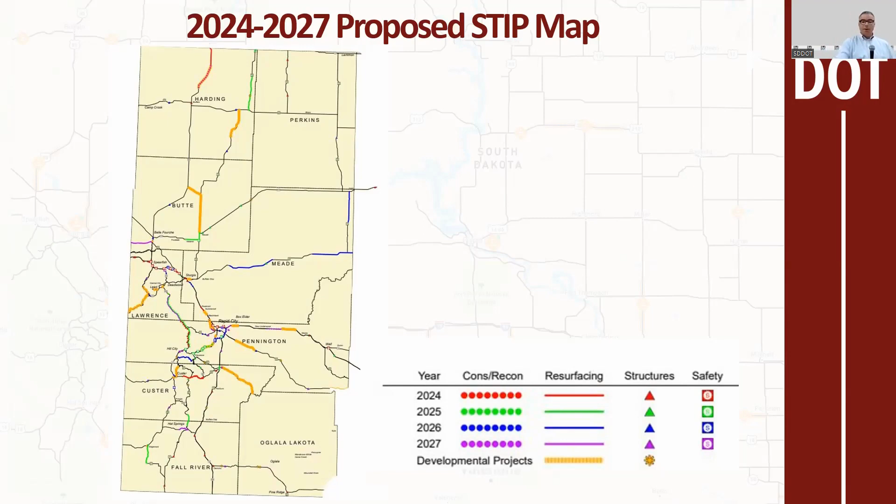Or take input, so please use them as much as you possibly can. As we think about transportation, the intent of the meeting tonight is to be engaging. We're not going to be speaking the entire time. We're going to be asking for input, hopefully have some good collaboration and discussion.

As Todd mentioned earlier, we're going to have that opportunity to speak into the microphone tonight. Again, if that's not your cup of tea, we're going to be around afterwards, split up into different groups. So if you've got different ideas or questions on safety or other things, please come over and visit with us afterwards. But again, we only know what we know, so if you're seeing things, hearing things, maybe you've experienced a couple issues, please share those with us. We'd like to improve transportation and safety overall.

As we think about a transportation system, you have to fund it, right? The money's got to come from somewhere. So transportation is really funded through federal aid and through state fuel tax. You can see what our anticipated expenditures are into the next 4 years: 1.2 billion planned in 2024.

Anyone here driven Highway 44 near the Platte Winner area? We have a very, very long bridge out there, over a mile long. We're planning for that bridge to be replaced starting in 2024. Don't worry, the existing bridge is going to be there while we build a new one. But that project alone, that one bridge, is about $250 million. That's one of the big reasons you see that project and those dollars going up in that first year.

As you look at South Dakota, we have East River and West River. That's kind of how we define things in our state, because the river really divides the state to some degree. So the bridges that we have crossing the Missouri, a lot of those were built 40, 50, 60, 70 years ago, and they're starting to show their age.

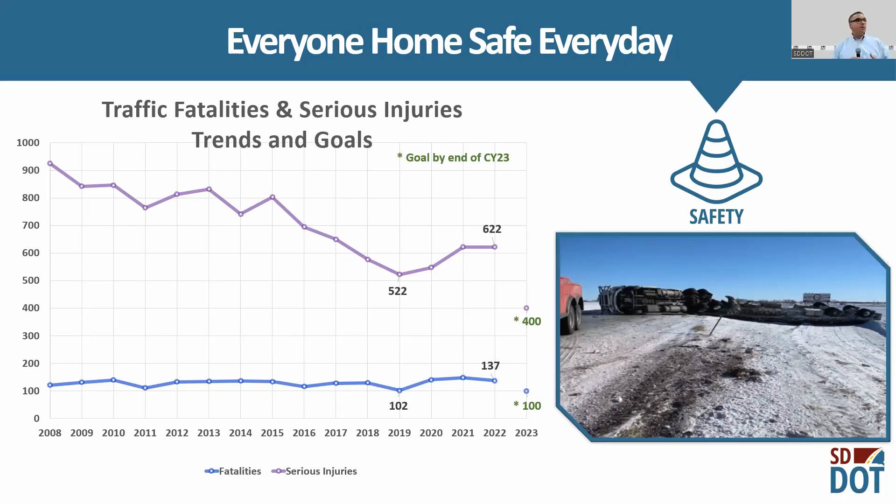As we think about crashes and what causes crashes, is it the roadway? Is it the intersection? Is it the person? Is it an intermix of all those? Those are things we have to be thinking about as we move forward.

We've tried different tools, techniques, and innovations. For those familiar with that noise, that's our rumble strips. I think if you make that noise, most people know what they are. And they've saved lives, whether they're on the center line or on the shoulder. Some of the numbers up there show how effective they've been. They actually serve no purpose from a transportation standpoint, and they're actually a detriment to the life cycle of that pavement, but they keep people alive.

High friction surface treatment is another technique we've used. We joke that we've got two seasons here in South Dakota: construction season and winter. And when you're not expecting a slippery condition, maybe on a curve, that's where we see an overrepresentation of crashes and serious injury and fatal crashes. So we tried this technique of high friction, using a very abrasive, very hard rock, essentially gluing it down to the pavement. It helps ensure there's good interface and makes sure that tire can stick to the pavement more often. Again, a technique trying to make sure drivers are staying on the roadway.

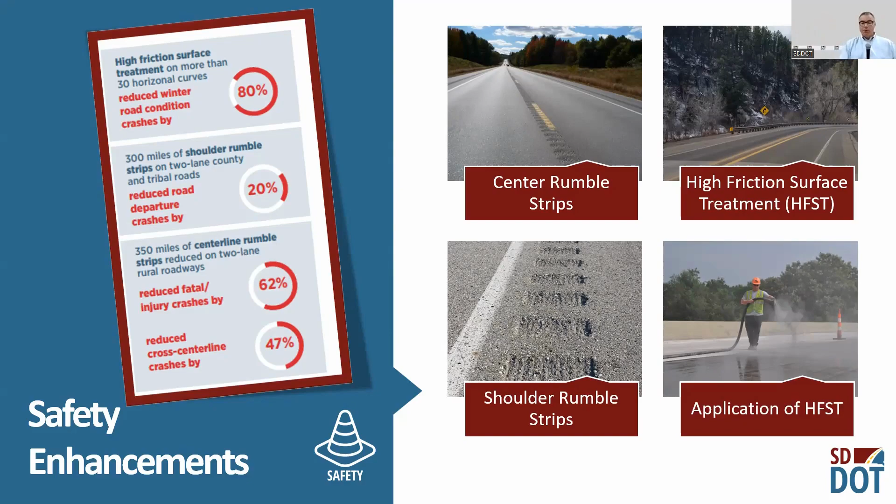We've tried other things and we're going to continue to try innovations. I think most of you folks made it through the Diverging Diamond Interchange. Did anybody not make it through the Diverging Diamond Interchange here at LaCrosse tonight? Awesome, excellent, 100%, and everybody made it here safe. And it worked very well.

For those of you in the Rapid City area that have used that before, when we didn't have the Diverging Diamond, you know what it was like. You'd get traffic queue spillbacks, you couldn't make your left turns, and people were taking chances when they shouldn't. Every time I've been through that, which is four times now, I've seen pedestrians using it and they looked comfortable out there. So another good improvement, knowing that transportation is not just about moving cars and big trucks, but people use our facilities too. So as we think about safety, we need to be cognizant of that.

We've got another one planned on 41st Street coming up. And of course, our 511 app. For those of you that aren't aware of the 511 app, we'll help you get it downloaded on your phone after the meeting tonight. It's an excellent tool you can use to help improve your decision-making when driving in poor weather conditions, or improve your travel time, or plan your trip based upon construction activities. Again, trying to put the information in your hands and users' hands to make good decisions.

Now, Todd, I know safety is a priority for the department, but it's been a huge priority for you. We've had the pleasure of working together for over 20 years, and one of the things I've learned from you is we need to be safer. What are we going to do? How can we keep people safe on the road? So do you want to cover a little bit what's planned here in the Rapid City region?

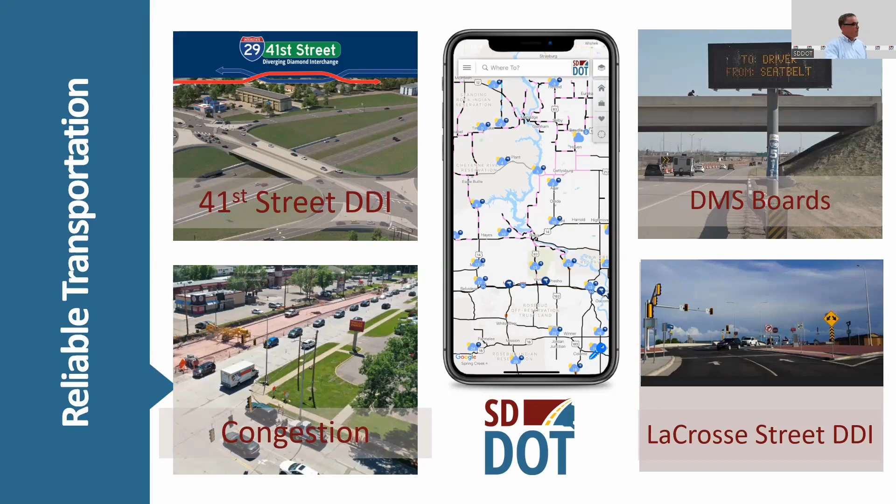Yeah, just one thing I'd like to point out, Mike, is again, you want to reference the handout you all should have. This is the projects within the Rapid City region. In that handout, as Michael was referencing, there's a lot of standalone safety projects, and they're pretty easy to identify. I might point out those high friction surface treatments, where we glue some really abrasive rock to the roadway, which really reduced the number of wet weather crashes we've had when we use that product. There's signing projects where we actually funded signing upgrades on county roads that will improve the safety of those roads. There's a shared use path that the department has funded for local communities, to get pedestrians off the roadway and on their county path. And as Mike pointed out, rumble strip projects.

But one thing I'd like to point out, as we start more of the interactive discussion, is the importance of roadway width to safety. On the slide up there on the map, there's 13 projects within the Rapid City region where we're making the road wider, which is probably not a surprise to everybody. A wider road is a safer road.

For every foot of shoulder we have on a road, we see a reduction in crashes. So the department's making a very substantial investment in widening roads, on either extending shoulders or complete regrading of projects, to make a roadway wider. And we're expecting a significant reduction in crashes on those roadways.

So as you think about safety and needs on the statewide system, are there roads that we're missing? When it comes to safety, what are we missing on those roads? Projects that should be improved. And the investment plan is over $160 million, which is a huge investment.

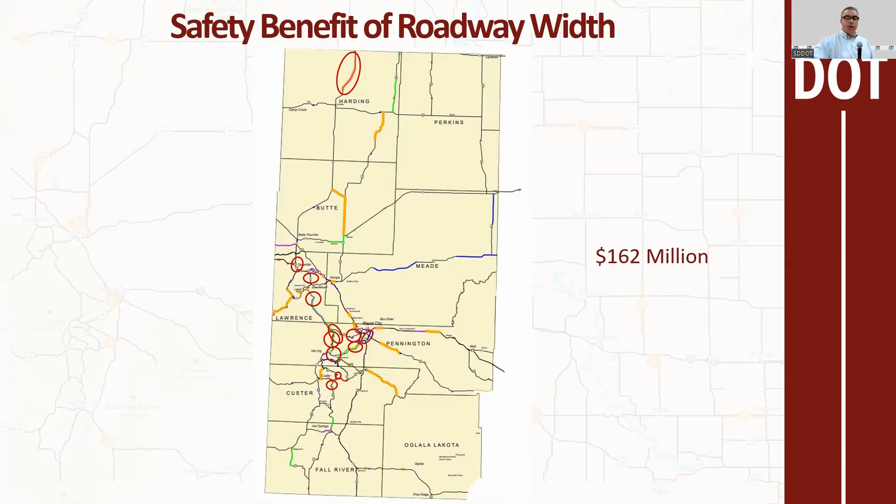So this is the part where Mark is going to be ready to start handing off the microphone, because I think it's important that we hear from you on what opportunities you see to help improve safety. And I've got 3 areas.

The first one's on the road. And the reason I'd like to focus on that is our number 1 fatal crash in South Dakota is a single vehicle runoff road crash. So that's our number 1 fatal crash that we have in our state. Our number 2 is at intersections.

And it wouldn't be anything if we didn't talk about what happens in the car, because driver behavior plays a huge part of whether you're on the road and how you're navigating down that road or at an intersection and making decisions. So we've had some great conversation in Aberdeen, in Sioux Falls, and I'm expecting the best conversation here in Rapid City, because it's the best group that we work with all year, but don't tell the others that.

So Mark, you can be ready to go, and please raise your hand if you have some ideas, things you've seen in other states or things you've seen that work well here in South Dakota.

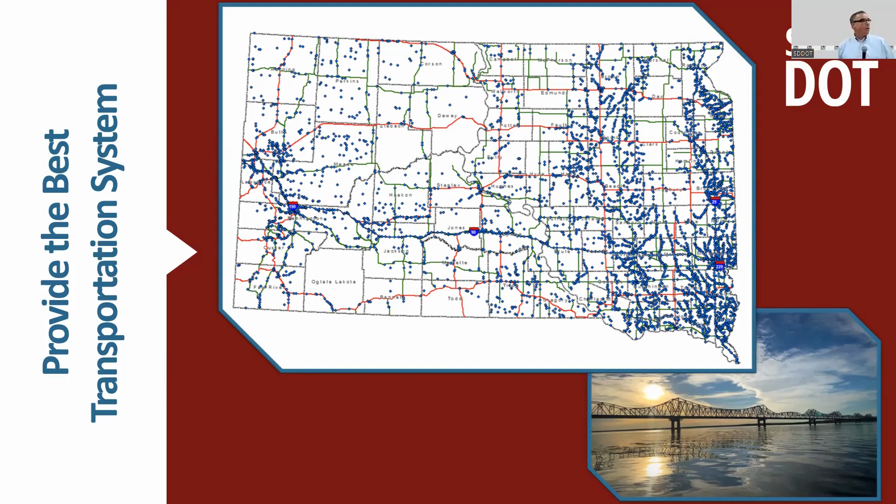As you look at usage and how many trucks or vehicles are going over, obviously there's more in the state highway system with the interstate and higher travel volume roads. So we're trying to maintain our bridges in good condition. I mentioned earlier the Platte-Winner Bridge, the Forest City Bridge, and the Pier to Pier Bridge. We measure all of our bridges as being in good, fair, or poor condition, just the general 1, 2, 3. You can see the condition and anticipated condition of our bridges in the next 5 to 10 years.

Right now we're sitting at about 97% of our bridges in good to fair condition. You can see we're anticipating that to drop off a little bit. We've known we're in pretty good condition, which is why we're really focusing on those major bridge investments coming up, like the Platte-Winner Bridge and the bridge near Gettysburg, which are going to cost hundreds of millions of dollars to construct. We're also trying to ensure the condition of our bridges remains relatively good, because like any asset, like a vehicle, if you don't change the oil, it's not going to last you 100,000 miles. So proper, timely maintenance activities on those bridges have been critical, and we're going to continue to do that.

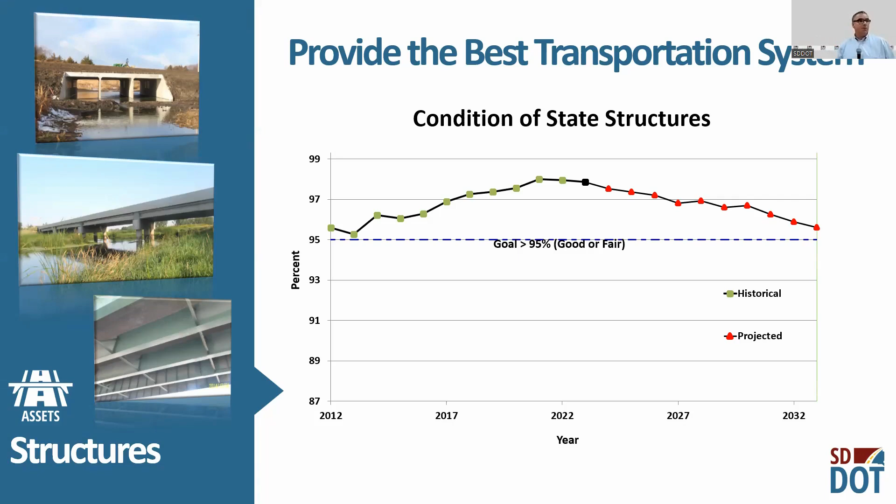We're also not just investing in bridges, but investing in innovation, ways to build bridges better so they last longer. In the upper left-hand corner, there's no such thing as flood proofing, but there is flood resiliency. So we're incorporating new design features to ensure our structures last longer and can survive those very large events that in theory come only every 50 years, but sometimes it seems like they come every 10 years. If we have a piece of infrastructure that costs $20,000 per linear foot to construct, you want to protect that investment.

In the lower right-hand corner is actually just steel, but it's stainless steel. We've got 2 seasons really, construction and winter. When winter comes, we use quite a bit of chloride salts on the roadway, and when you put salt and water next to steel, it doesn't turn out very well. That whole chemical composition changes the steel and turns it into rust. When things rust, they get bigger, and when they get bigger, concrete spalls and starts popping out. So by using stainless steel in our bridge decks, it costs more to begin with, but we can save over 25% in the overall life cycle. Again, a change, trying to innovate and find new ways to do things.

And yes, in the upper right-hand corner, that is a drone, an unmanned aerial system that we actually use for inspection on our bridge structures. We can also get additional information. We're looking at using LiDAR, trying to get 3D visualization of those bridges so we can do better analysis and engineering on them. Again, trying to find ways to do things better so things last longer.

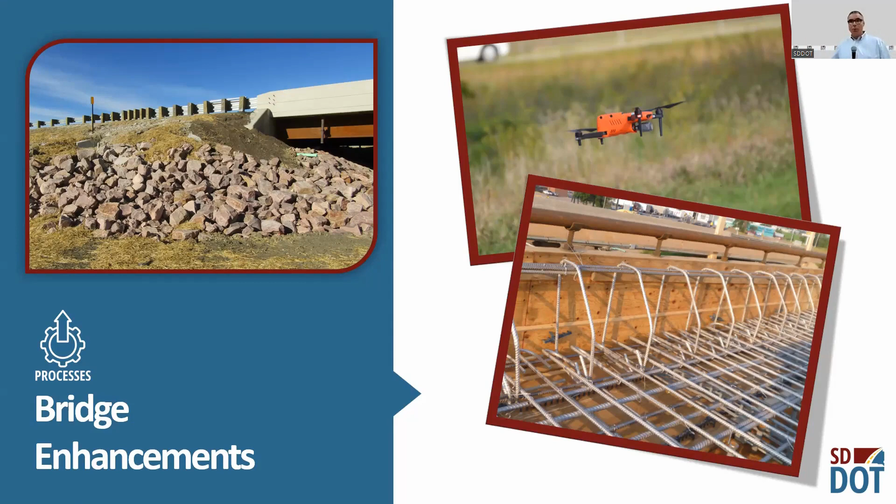Our pavements, of course, are needed too, otherwise you just got a bridge over water - it may be trouble or not, but I'm not going to get into that. Our pavement condition, as you can see, we try to maintain at least 80% of our pavements in good condition. You can see the line at 20% - we want no more than 20% in yellow or red, which would be poor to fair condition. Right now in 2024, around 90% of our pavements are in good to excellent condition. Looking into the future, we're starting to see that drop a little bit.

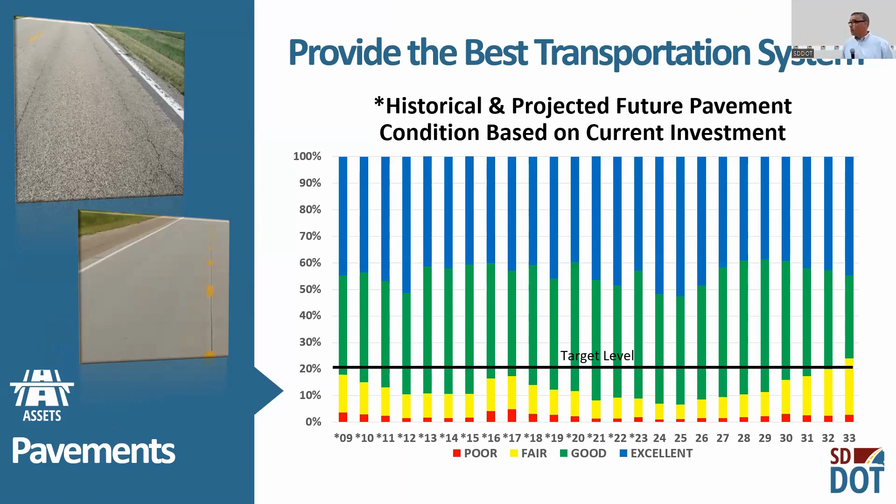So what are we doing? How are we trying to build pavements better? We're employing innovations. Some of that is a notched wedge joint, and I know that sounds really odd, but like anything - or a dovetail connection if you're a woodworker - how can we make those two joints tighter? Because water and salts are our biggest enemies here in South Dakota.

In the winter, you get freeze-thaw cycles. With pavements and roads, it doesn't just freeze in November and thaw in March. It goes through hundreds of freeze-thaw cycles throughout the winter. When that water freezes, it expands and blows things up, so that weak spot's right in the center, which happens to be right where we put those center line rumble strips sometimes too.

So what are we trying to do, and what innovations are we using to make that pavement last longer? We're notching those together, trying to make that tighter seam. In the lower right-hand corner, that's a new concrete pavement opportunity we're using, next generation concrete pavement. We're going to pave it and grind it. It may sound weird that you're going to grind something brand new, but it gives us better ride and better durability at the end of the day.

Again, trying new innovations. In the upper left-hand corner, no, that is not a fish locator. That's actually something we use to help with intelligent compaction. I know it seems odd, smart compaction, you're just hitting something, making it harder, but it's intelligent compaction. Thermal imagery along with GPS make sure that the roller patterns, as they go over and roll that asphalt, get it to the optimum density at the end of the day. Optimum density means it's going to last longer. Again, trying new technologies and innovations to make sure that investment lasts for future generations.

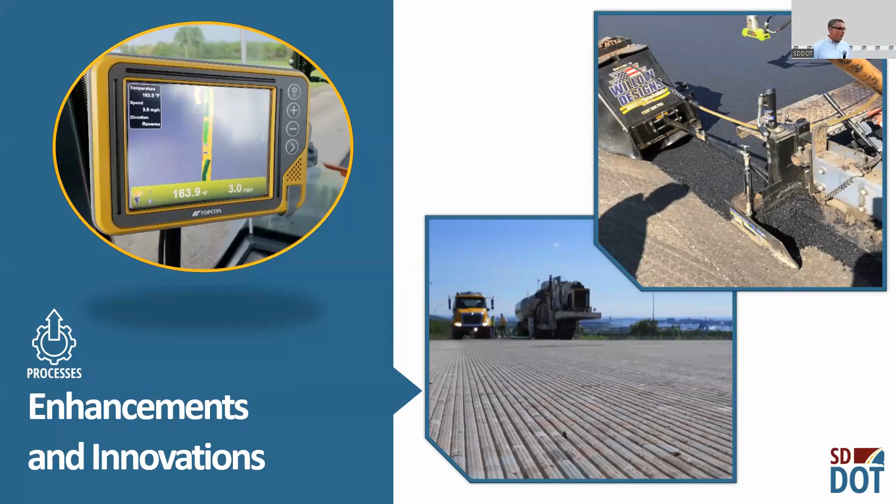Now, Todd, I know there's a lot of work coming up in the Rapid City region. You just want to give a quick summary of the overall investment? Yes, sir. In the handout that you keep referring to, projects within the Rapid City region total about $805 million worth of work. That's quite an investment in the 9 counties in western South Dakota.

To break that down, there are about 36 bridge projects at a cost of $113 million—those are bridge replacement or bridge repair projects. There's 22 reconstruction projects totaling $516 million, a very large investment in reconstruction of the state highway system, and 23 surface repair or preventative maintenance projects totaling $138 million. So a very large investment in transportation needs in western South Dakota.

So what's missing? That's why they're here. Oh, yeah, they're going to help.

One thing on top of that too, we're sharing the federal aid that's passed for the department, or the commission understands and is really focused on an interconnected transportation system. It doesn't do any good to just have the interstate system run through South Dakota—it'd be a heck of a long 4x4 ride to get there. So we need to have interconnectedness. And of course, if you're going to grow grain on the back 40, you need to get it from the farm to the market. So trying to ensure that interconnectedness is there, our commission has helped our local government significantly invest in their system as well.

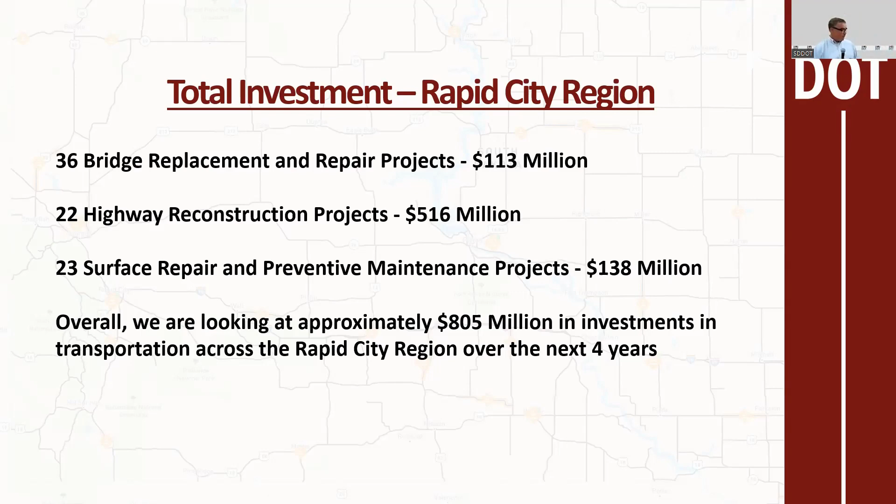So big investment here in Rapid City, almost $1 billion. That's a huge investment. Todd's going to get into a few additional projects a little bit later on with a bit more detail. But for right now, I'm going to ask you some questions, so be ready.

How can we get better? We're looking at our pavements, our bridges, and maybe lighting, our signal systems—maybe things you've seen in Montana or Colorado, perhaps, things that have worked well. Things working well here in South Dakota, saying, hey, duplicate this, do more of this elsewhere. So please raise your hand. Mark's in the back, he's ready to come over, and we want to hear from you.

I'll just keep throwing out ideas that I know. In the time I've been in South Dakota, over a dozen years including vacations, the one thing I appreciated was the ruralness of the state, a lot of open roads between cities. What I'm noticing as I live here is that those areas seem to be growing closer together.

With that, we have an exchange between those cities. As those communities grow closer together, I think we need to look at speed and the speed impacts, and consider lowering limits. For example, on Highway 16, when you drop off the hill over at Reptile Gardens, that's still a 60 mile an hour zone. I think that could be reevaluated to a 45 mile an hour zone, which would solve a lot of problems from there to the top of the hill on the other side.

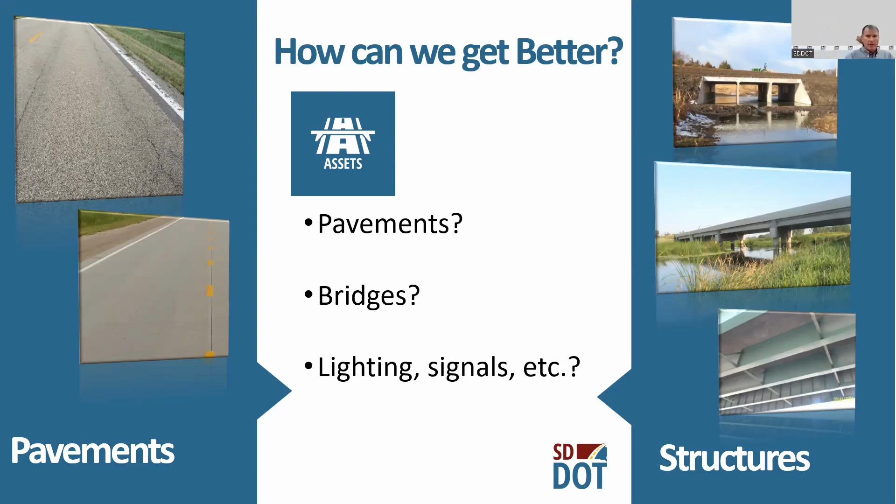$800 million. I don't know, we have enough time, it's only 162 projects I'll cover, so it should take... So again, I sound a little like a broken record, but the handout you should have received when you came in the door.

That handout is the 2024 to 2027 Transportation Improvement Program. My slides are going to reference the project number in that handout, so if you want to follow along, that would be great. I'll go through these quickly, just a very few projects within the Rapid City region. If you have questions on individual projects, please seek out one of our area engineers or other staff with name tags, and we'd be glad to help you with those.

Starting with 2024 surfacing projects, number 10 in your handout is Highway 16A. That is what we call a mill and overlay through Custer State Park, where we mill off about an inch of the roadway and put 2 inches back on. That is an $8.5 million project.

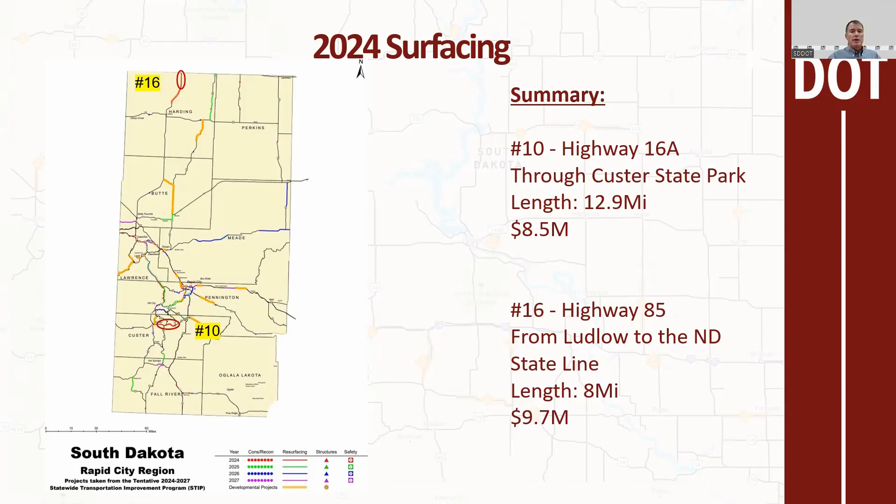Number 16 in your handout is Highway 85 from Ludlow to the North Dakota state line, estimated as a $9.7 million project. Again, another mill and overlay project.

Also in 2024, some grading or reconstruction projects significant for our region. Number 25 is the reconstruction of I-90 from exit 44 to 48, which also includes the reconstruction of exit 46. That is a $58.6 million project.

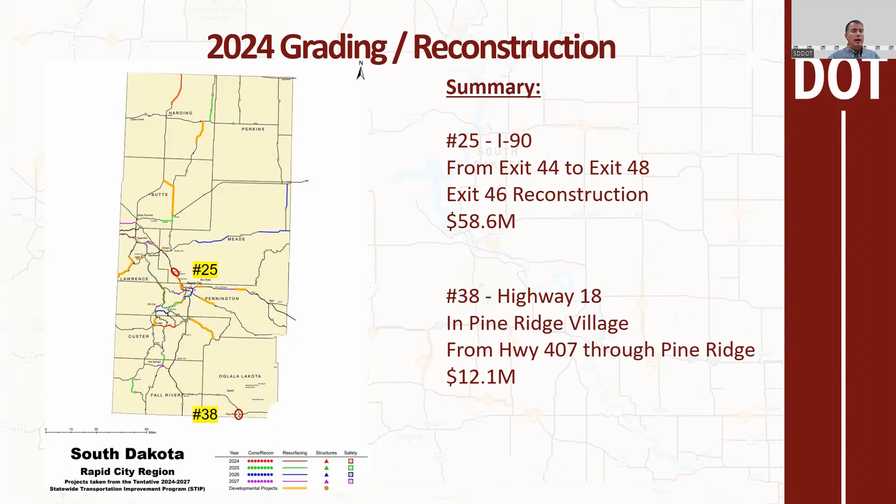Also in 2024 is number 38, Highway 18 in Pine Ridge Village. That's going to be a complete urban reconstruction, new pavement, new sidewalk, upgrade to roadway lighting and signal systems. The estimated cost of that project is $12.1 million.

2025 surfacing project number 76 in your handout is Highway 212 and Highway 79, just south of Newell, South Dakota. The length of that project is 10.7 miles, and the estimated cost is $12 million.

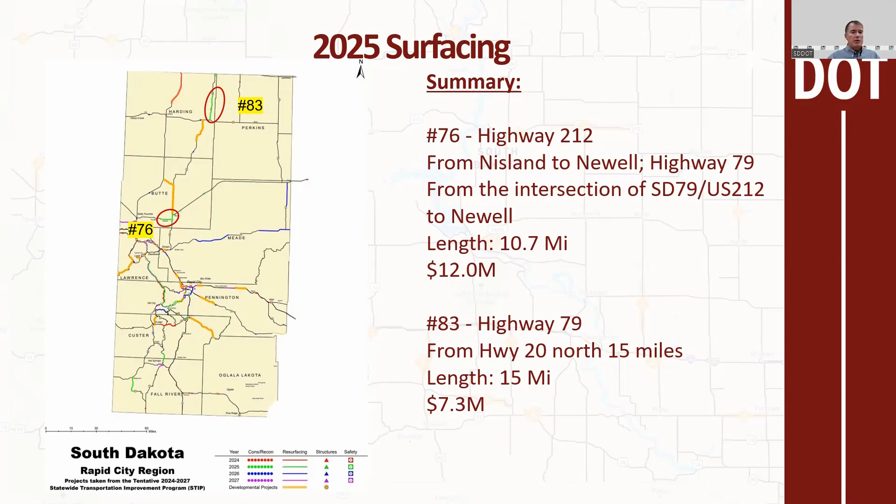Also in 2025 is number 83 in your handout, Highway 79 from Highway 20 North, 15 miles. The cost of that project is estimated at $7.3 million.

Moving on to 2025, some significant grading or reconstruction projects. Number 87 in your handout is Highway 385, West Rapid City. The project runs from 4 miles north of the intersection of Highway 44 and north to Nemo Road. The cost of that project is estimated at $35.6 million.

Number 95 in your handout, the intersection of Highway 16 and Neck Yoke Road, right at the Reptile Gardens area we just discussed. We're going to do a grading project there and modify that intersection into what we call a reduced conflict intersection. If you have questions on that, we'd sure be glad to take those.

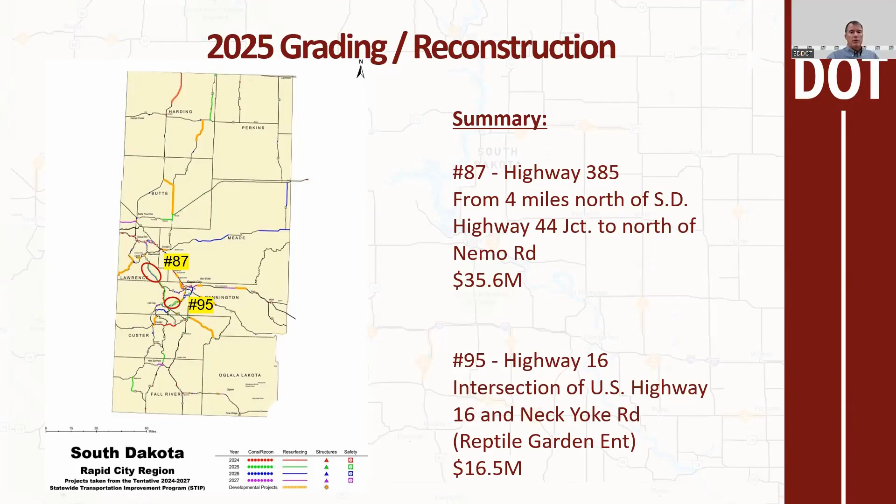Moving on to 2026 surfacing projects, number 153 in your handout is Highway 34 from the Belle Fourche River to 3 miles west of Union Center. The length of that project is 20.7 miles, and the estimated cost is $9.5 million.

Number 159 in your handout is Highway 244 from Highway 16 to Mount Rushmore National Memorial. Length of that project is 8.7 miles, and the estimated cost of that project is $3.8 million.

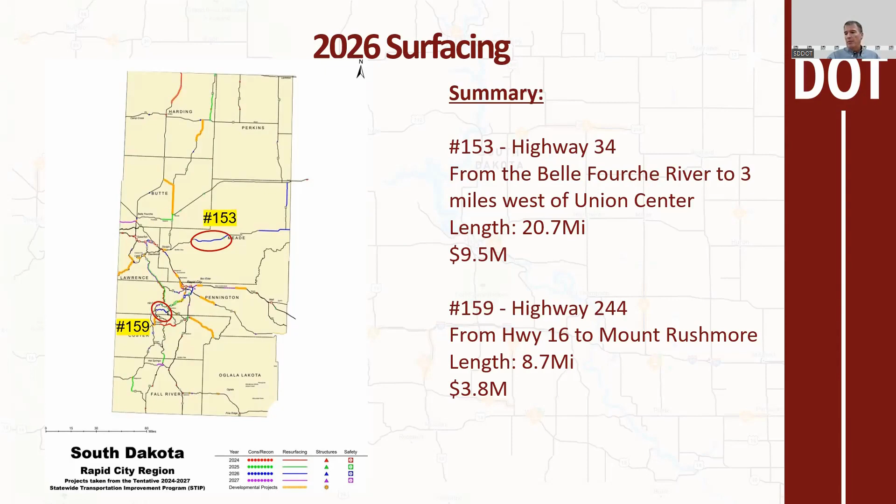2026 grading or reconstruction project number 143 in your handout is again on Highway 16, in Custer, South Dakota. The project runs from 4th Street, the main drag through Custer, north to the U.S. Forest Service office, just north of Buckhorn Loop Road. Estimated cost of that project is $18.3 million.

Also in 2026 is item number 152, reconstruction of I-90 from exit 32 to exit 37. That also includes the reconstruction of exit 34 at the National Cemetery. Estimated cost of that project is $52.2 million.

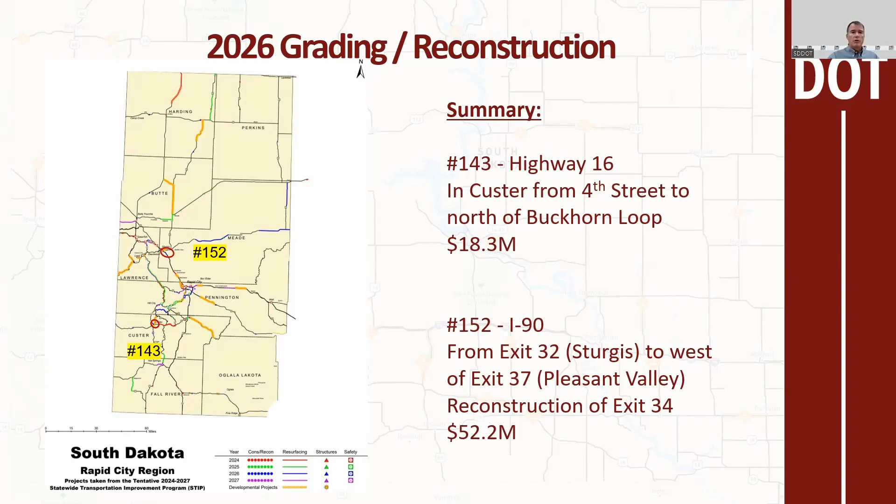So on to 2027 surfacing projects. Number 202 in your handout is Highway 34 from the Wyoming state line to Belle Fourche. The cost of that project is estimated at $6.5 million.

Also in 2027 is number 206 in your handout, Highway 18 from west of Hot Springs to Hot Springs. The estimated cost of that project is $8.9 million.

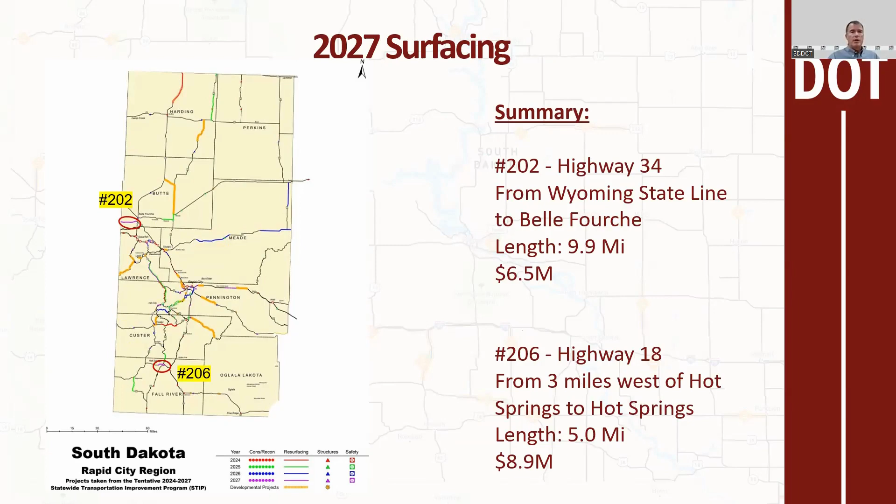Last but not least, in 2027 grading and reconstruction projects, number 207 in your handout, Highway 85 from 7 miles north of Buffalo to Ludlow, South Dakota. Estimated cost of that project is $31 million, and that again is a complete reconstruction project.

Number 216 in your handout is South Dakota 231, or better known to us who live in Rapid City as Sturgis Road. That project runs from West Chicago Street to Knutson Lane, just north of town. Estimated cost of that project is $7 million.

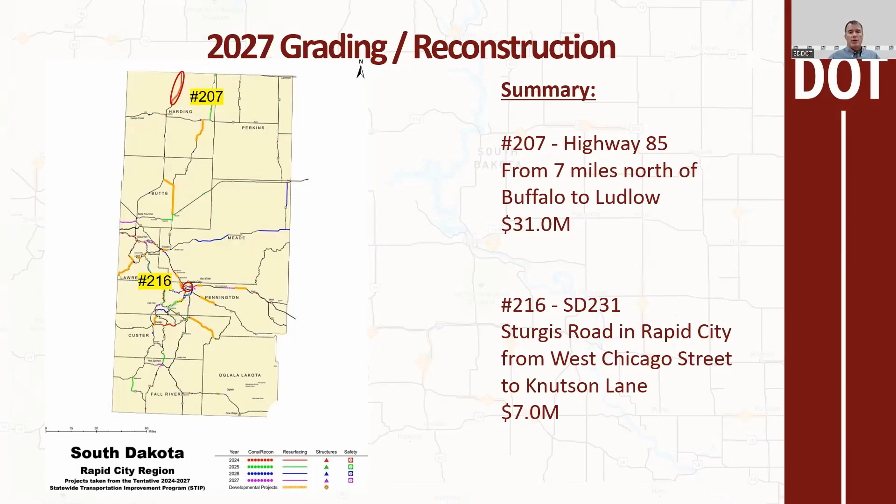Again, if you have questions or comments, you can always go to our interactive STIP page. A little tough to get that address on the screen there, it's quite long, but if you want to chase one of us down, we can get you that address. We also take comments that way, and again, it's a link to that interactive map. If you want a graphical display of all the projects within the Rapid City region or the entire state, it's available on that site.

Thank you, Todd. Just maybe hit on one more project that's not even on the list. One thing we've been working on is a variable speed limit project. Anyone driven across I-80 in Nebraska, or tried making that trip in the winter? It gets a little rough out there, and they've deployed variable speed limit projects, which allow the speed limit to be reduced during certain times or in certain severe weather events. There are some big benefits to that. Not only does it help reduce crashes, but it helps reduce closures.

My father, I spent a lot of time in the car with him. Anyone that drove faster than him was an idiot, and anyone that was slower than him was just stupid, because he always had it right. So as I drive down the interstate in what I consider to be poor conditions and somebody blows past me at 85 miles an hour, and I've got kids in the back, I'm not a big fan of that.

So I think the theory behind this is trying to get folks traveling about the same speed, and we're very excited about that.